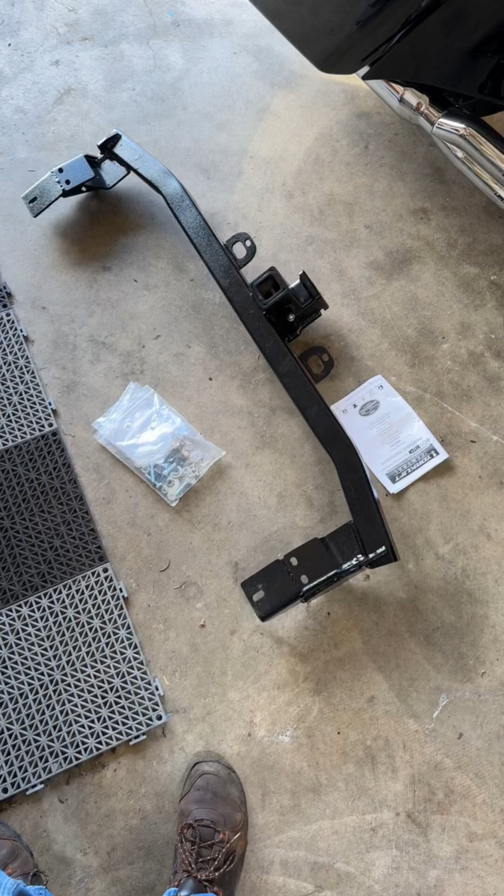Okay, we got the hitch with some bolts and the instructions. Let's get this thing installed on the 2023 new Prius. Okay, I want to be able to haul my jet ski. Okay, step one, chock the front wheels.

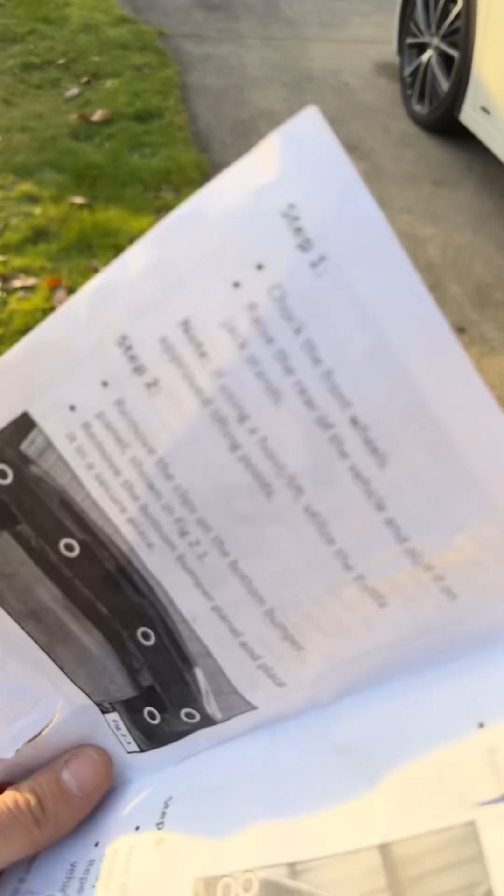Yeah, sure, it's done. Raise the rear of the vehicle with a hoist or whatever, place it on jack stands. Okay, done. Remove the clips, bottom bumper, shown in the panel. Okay, looks like I gotta pull some clips and some screws. Not too bad, let's see.

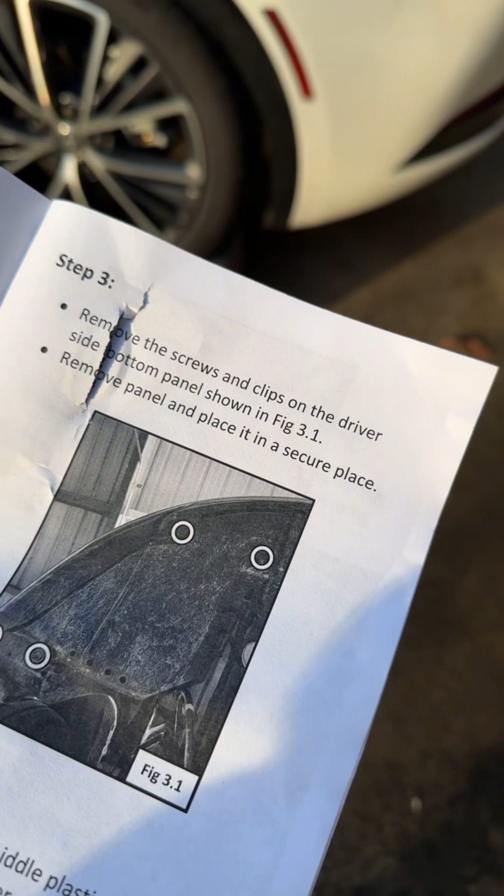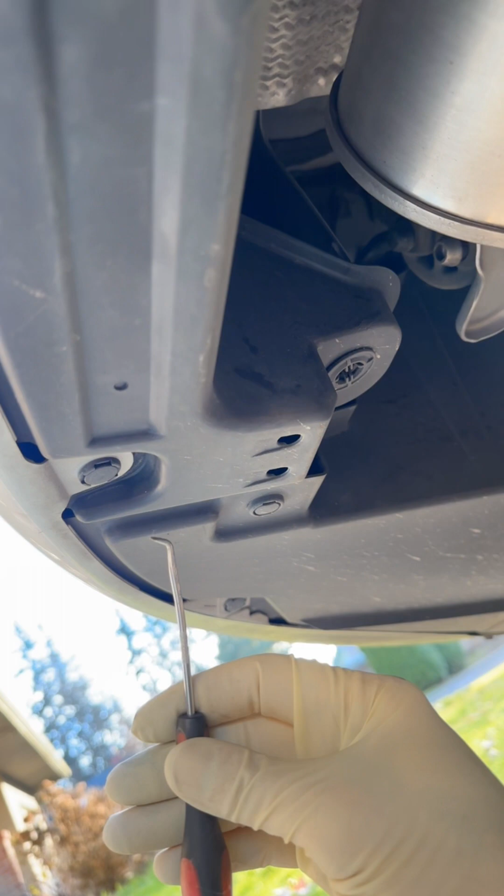Anytime you're doing a project, put on a set of gloves. That way you can do the whole project and be clean, ready to rip. So step one is pretty easy. Get a pick tool like this, put it in the clips. Let's go like this. Pop her on down. Grab it, pull it out.

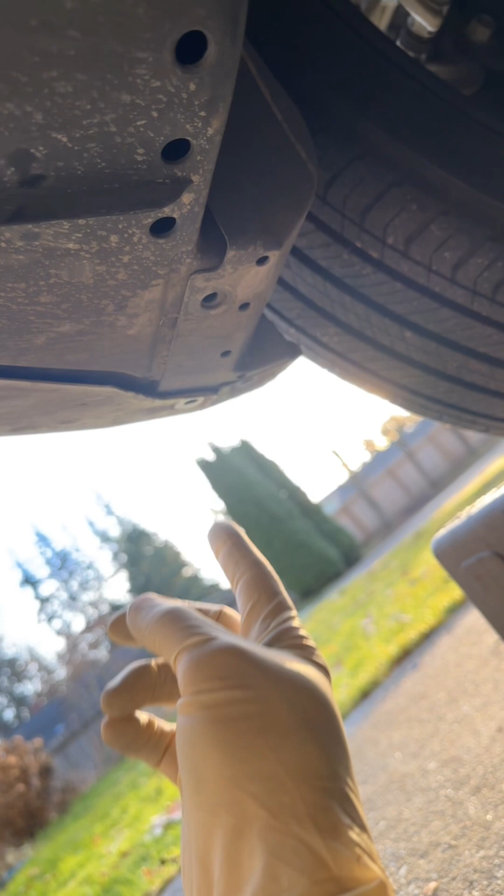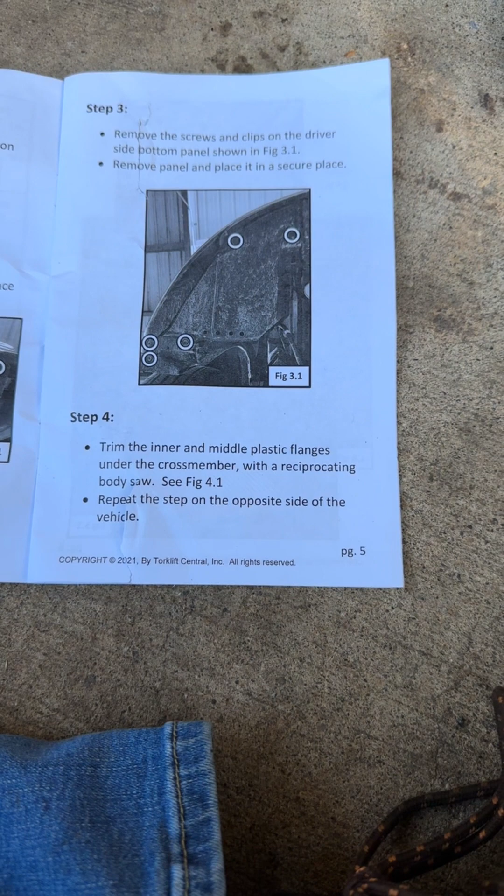1, 2, 3, 4. So the next step involved pulling one more clip here, one more clip here, and then 2 screws right here. Phillips screws, easy to do. So the next thing you have to do is trim the inner and middle plastic flanges under the cross member with a saw. And then do the same on the opposite side.

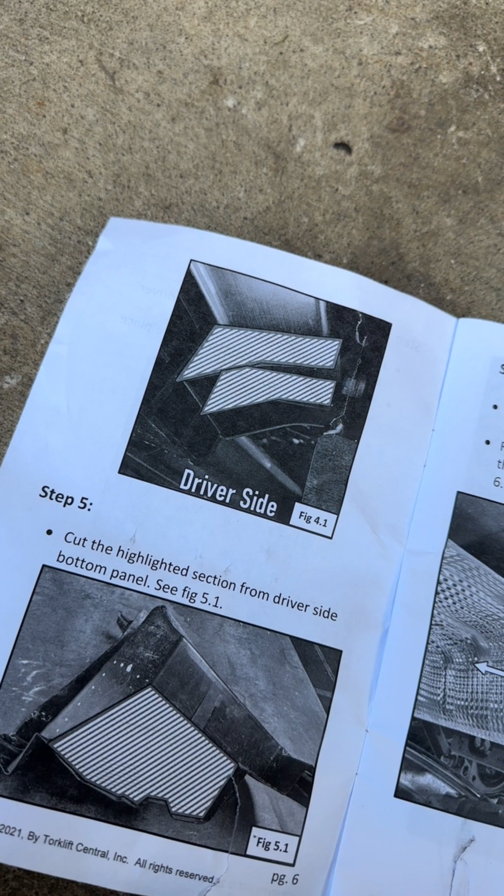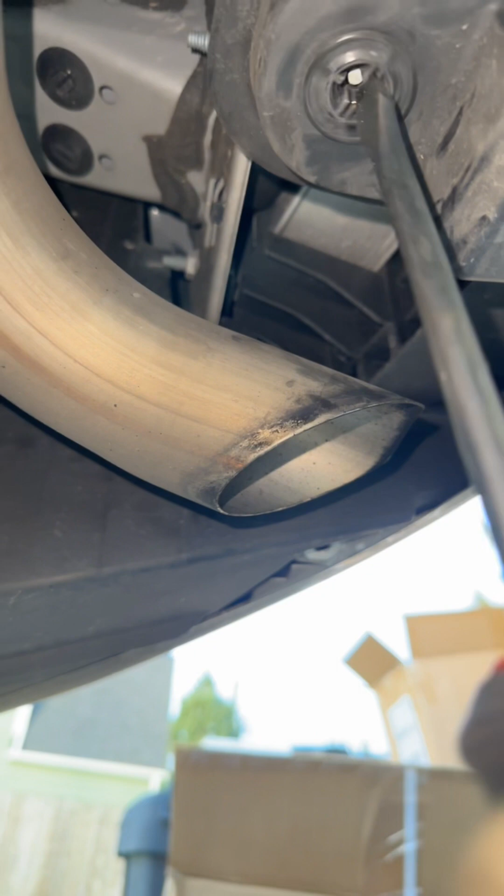So let's see what we gotta do. So it looks like we gotta cut out that and cut out that. I'll show you. So something I didn't show is you gotta take and screw out these little plastic screw-in clips here, just like this. Use a flathead, whatever you want.

Just something to turn it so then we can pop down this whole panel here. I already started to pop down this one, and there's one up there you got to do with a flathead screwdriver. So those 2, one there, one on the other side, and then this panel will come down, this panel and the other panel, and then you'll be able to trim them.

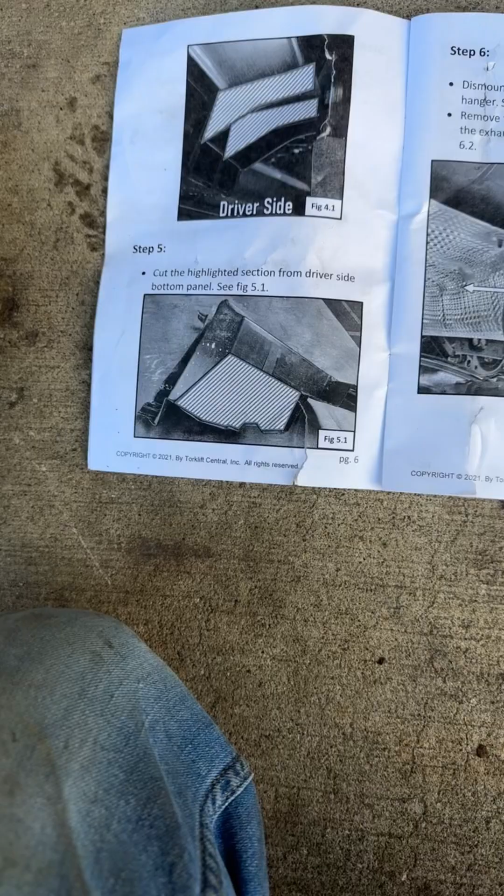So this part was a little confusing. Took me a second to orient this, so it might help somebody. Basically, this is the driver's side bottom panel. They want you to cut this section out here, which is only from here up to here and across to there and down. So that piece needs to be cut out.

And as you can see from the bolt pattern, it's 2 little ones, one larger one. That goes right here. You need to dismount the exhaust hanger bolts. Just take this out and support the exhaust. Pull this off, these 2. Pull this cap off. I'm gonna be putting in an internal nut.

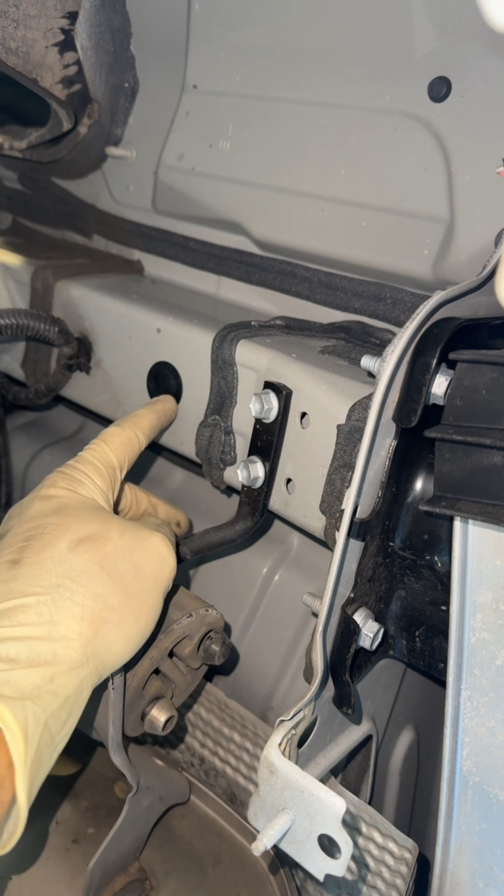And basically this one there, these 2 here. Same on the other side, just about. It is basically these 2 here will come out and this here. And you might want to lower the exhaust down just to give you a little bit more room. I think I'm going to be able to just squeeze this up in here, get it weaseled in there.

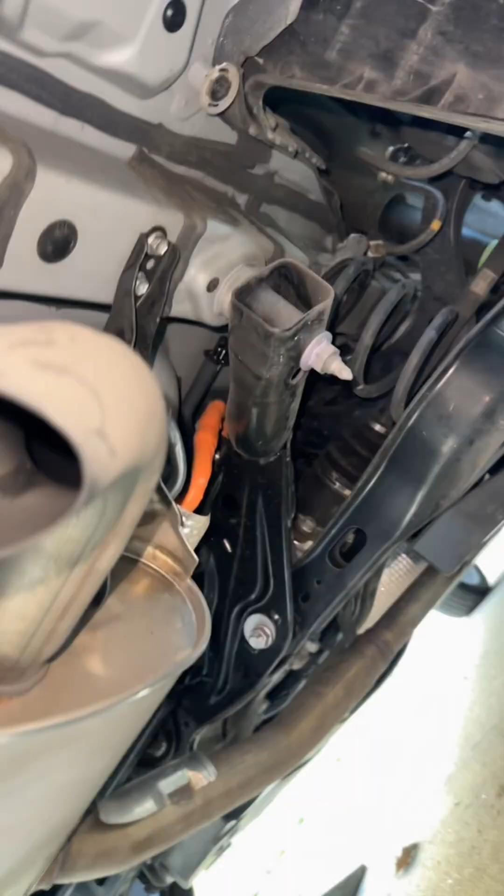We'll see. And as you will see, once you pull those 2 plugs, these 2 are threaded, ready for your 2 bolts. There's the open hole for the internal nut that we're going to slide in there. I'll show you how to do that.

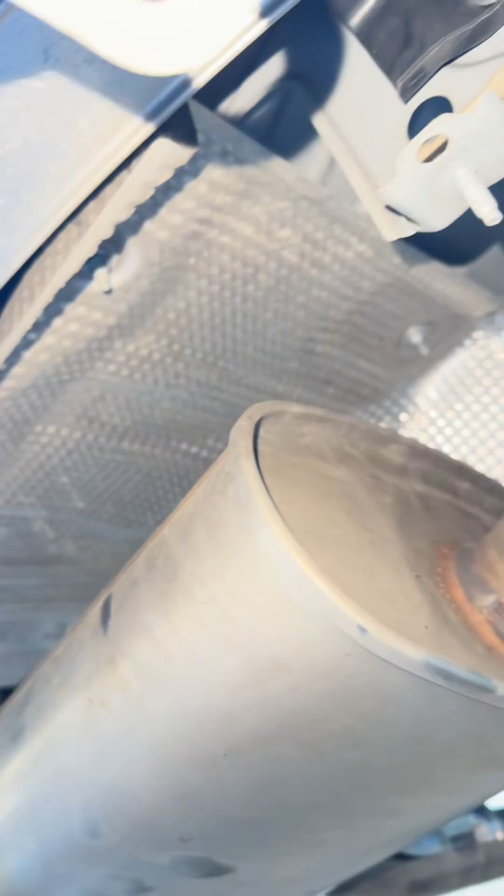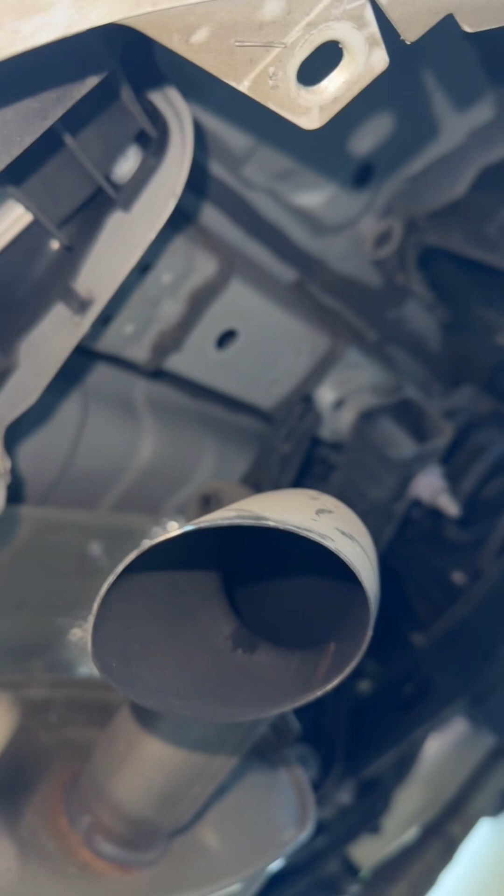And you'll see once you drop down the exhaust, these 2 bolts and the other 2 on the other side, the exhaust will fall down enough. It will hang on the front mount, so just let it easily slip down. This will give you plenty of room to put the hitch inside there and bolt it up. Now the next part is doing the bolt fishing.

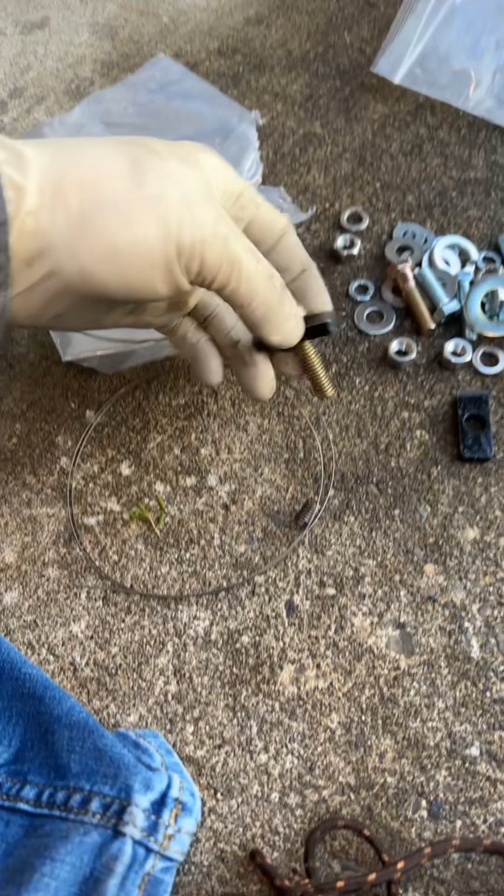So we need to fish these bolts, these two, down through the frame. And the way you do that from the inside, I'll start to do this with one hand, but basically you put it in there like that. And then this wire piece will end up going on the bolt here. You screw it on, and then you fish it down through the hole. So it's actually really simple.

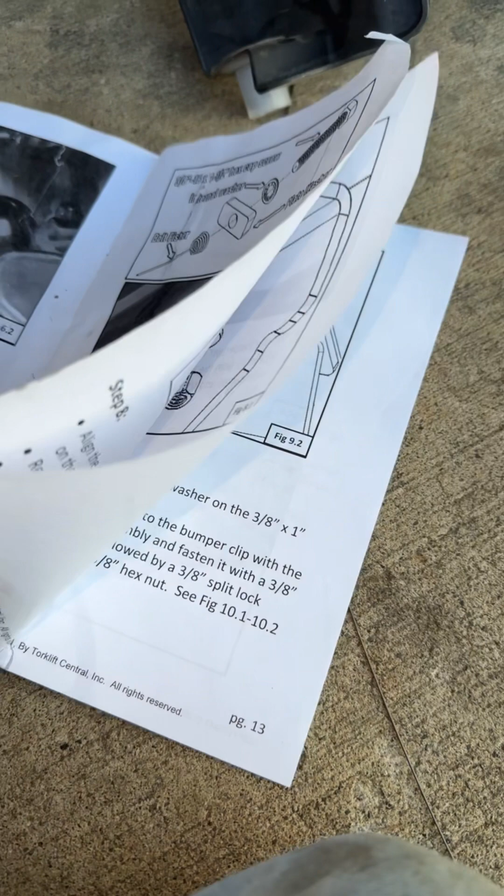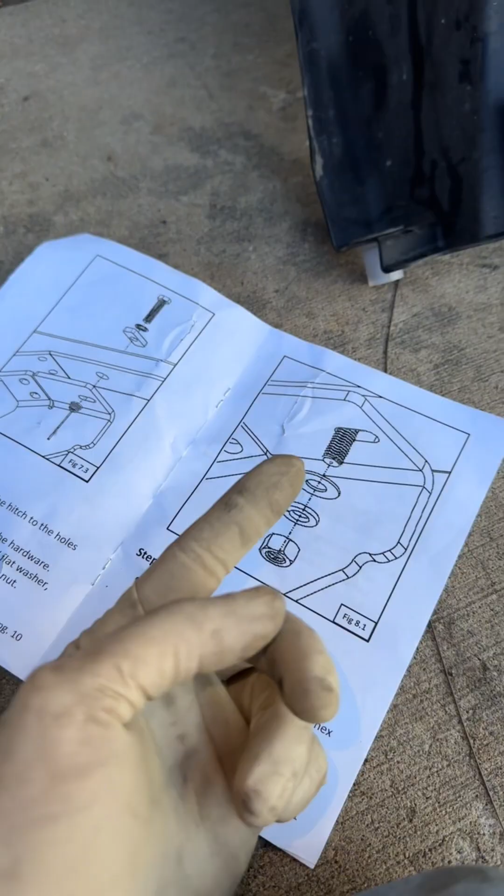You take the wire and you fish it in through the frame, down through the hole to get the bolt to stick out. Now you've got your bolt ready to go for when you put the hitch on, you can put the nut on. So I'm gonna try to show you how to do this. It's kind of a trick. You gotta take this all apart like this, so you have each individual piece.

Then you stick the bolt up in there first, just like that. Then the washer, get that up in there. It's kind of a trick. And then you take the plate, you slide that, get that up in there. Once it's all up in there, then you just wiggle it around until you get the bolt. Sometimes it's a little tricky.

You gotta get the bolt to come down through all the stuff. And for some reason, it's being a pain in the butt. I see. Sometimes give it a little wiggle or two, and hopefully you get lucky. In my case here, it wants me to use two hands, so I'm not going to be able to show you in one take.

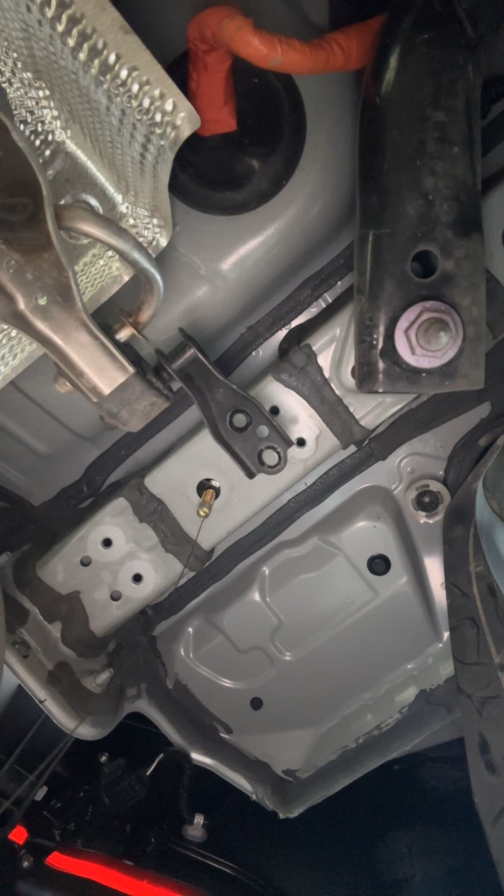Alright, took some finessing. As you can see, it all came through. So now you've got this ready to go onto the hitch. Okay, so got the bolts through. Got that bolt tight, those two tight. And basically all there is left now is to put the plastic pieces back on. And I got the muffler back tight, these two, tighten those two up. And then got those put in, just like that.

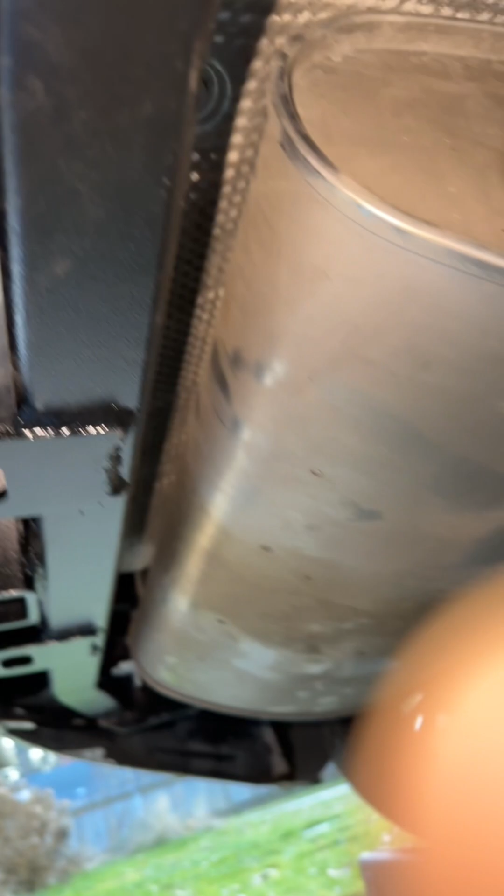I do recommend doing this with two people. It was a pain in the butt for me to kind of hold it with my leg and get it started. I fought it for a little bit, but she's installed. Looks really good. And as you can see, it's flush. So you can't tell that it has a hitch on it, which is really awesome because the hitch actually slides in from the bottom. Super cool.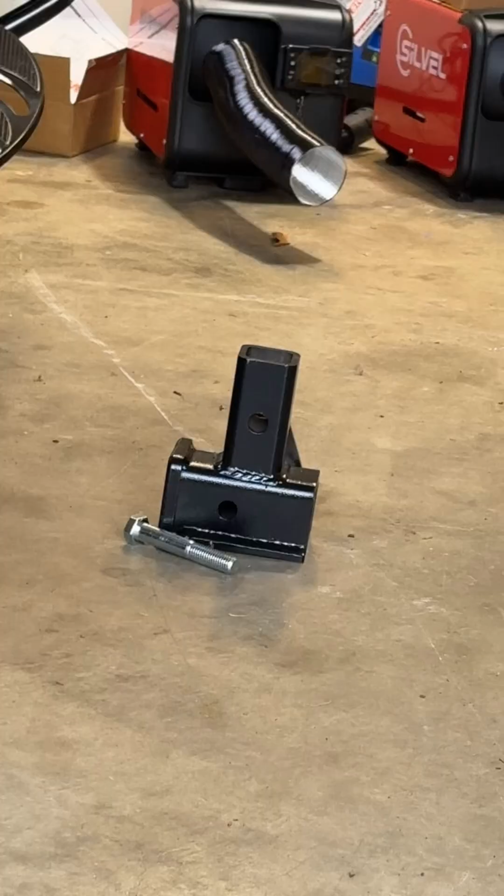Okay, so there it is, all installed. Nice and flush with the bottom of the car. Can't even tell that you have a hitch, which is really awesome. I didn't have to actually trim this plastic piece that they want you to trim right here. It actually just bends around the bracket, which is totally fine. And I still got all the clips in, fits really nice and tight, so it's ready to go.

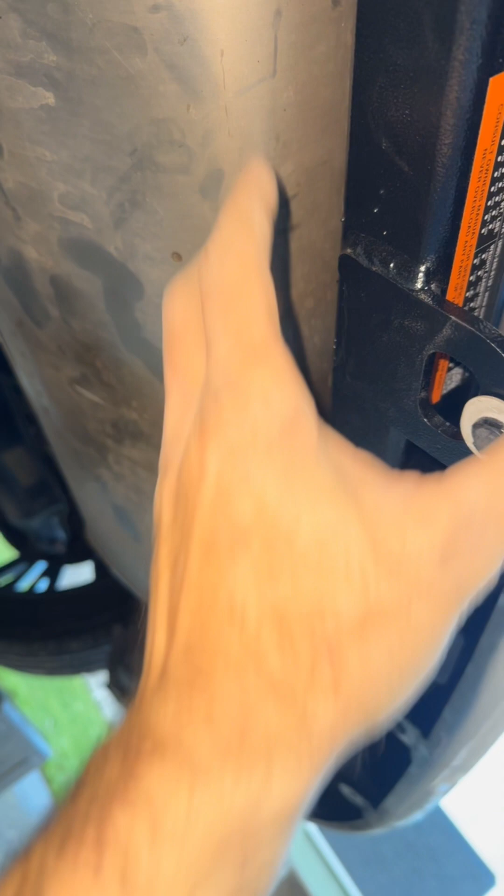Some people might be wondering why I didn't put this piece back in, and that's because I have a rear diffuser that's coming. It makes you take that piece out and the diffuser goes on here. So took that out and leaving it out for now, but pretty nice.

I love that the hitch is vertical and you slip it in and the hitch will go right here, and you throw a bolt in and then tighten it up, and then you can throw whatever trailer you've got on there and you can haul up to like 2,500 pounds, I believe, or 2,000 pounds. So perfect for hauling jet skis and maybe a quad or a dirt bike.